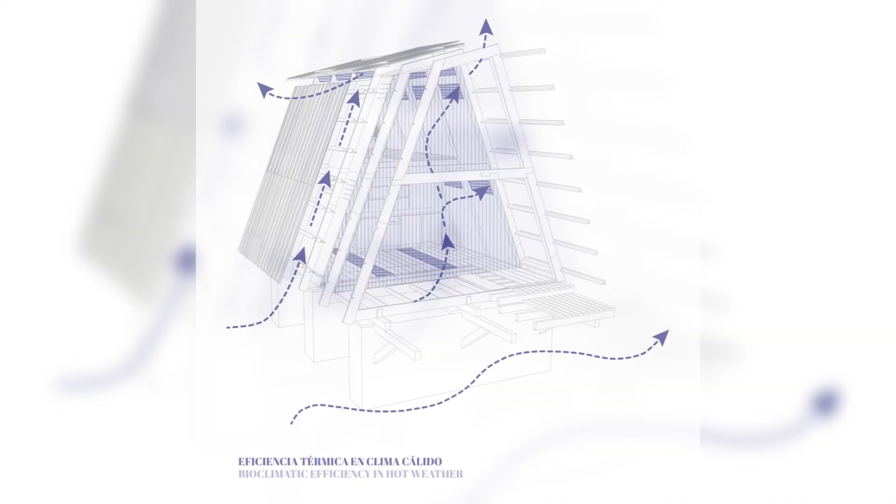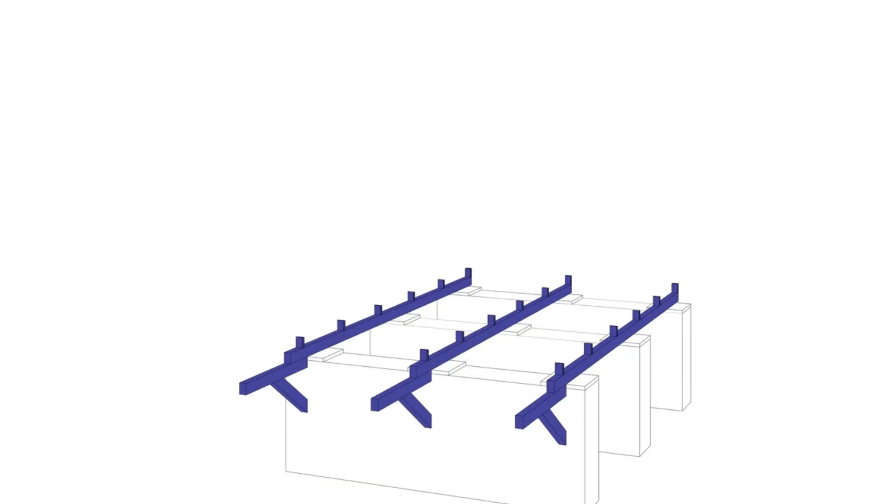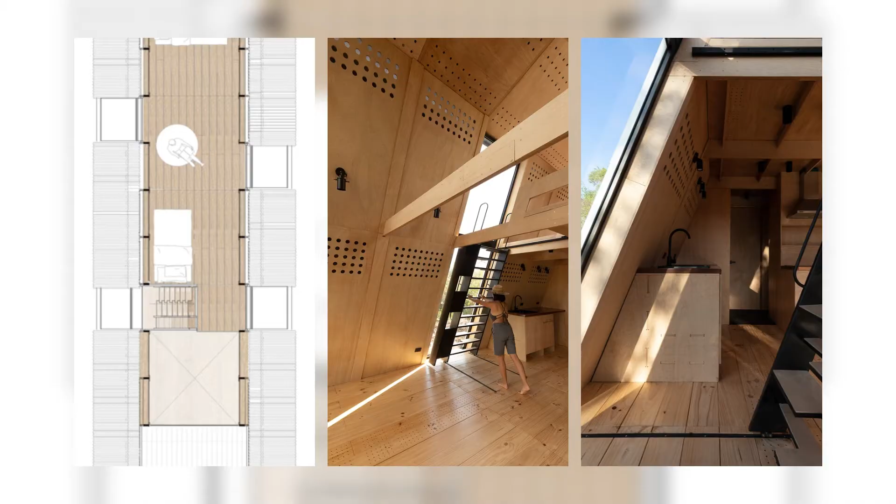Creating a sensitive and respectful habitat for all actors—the environment, the context, the user, and the team that conceives it—has been the premise of the design. Scalability, transport flexibility, adaptation to the context, and industrialization of processes have allowed the efficient use of resources, and most importantly, traveling with architecture has been achieved.

Sula is the second prefabrication exercise to validate the hypothesis that it is possible to generate a construction system that promotes collective well-being and generates minimal impact on the carbon footprint. A radical attitude towards approaching construction and the role that women play in architectural practice. It is the result of several battles to create the unthinkable.

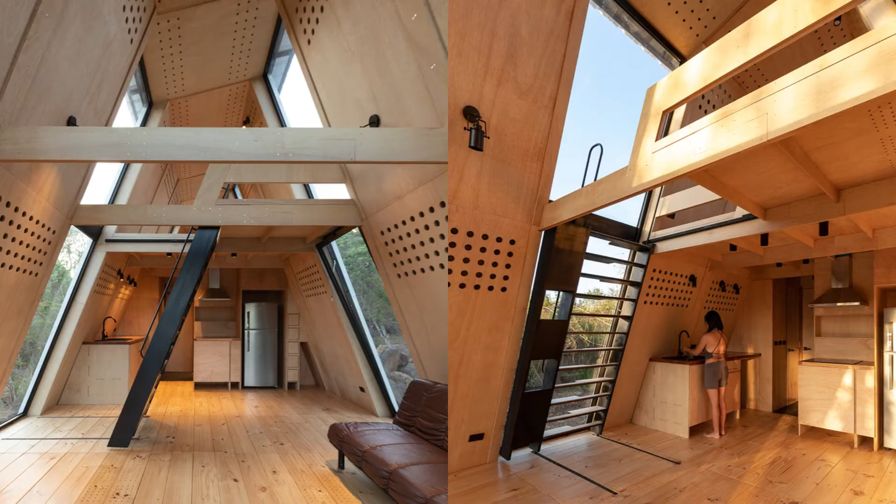Architecture: the design reconciles function with interior comfort by proposing bioclimatic strategies justified by dynamic thermal simulations. Sub-elevating the building allows for the use of inertia and the passage of currents to form a cold air chamber under the structure.

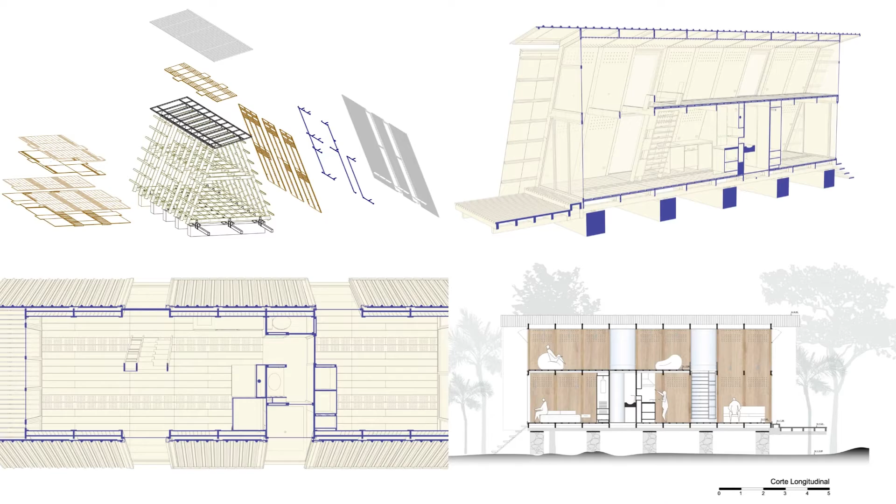The walls, along with the roof, create a double layer that houses the structural beams and forms another air chamber that ensures over-ventilation of the interior skin. Perforations in the floor and walls allow for cross-ventilation.

The elevation of the house also facilitates possible disassembly in case it needs to be relocated. Sula has its counted pieces. It functions like a large-scale Lego that can be transported in a truck and implanted in any type of environment.

The use of concrete is minimized to the maximum, which is why gabions were used as foundations, which can be easily dismantled in case of relocation, but above all, they are designed as a strategy to not affect the soil. It is a matter of respect for nature.

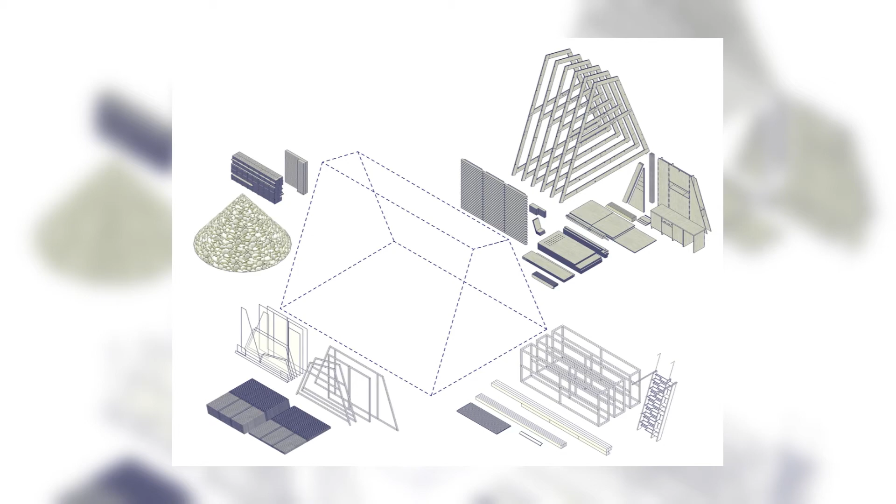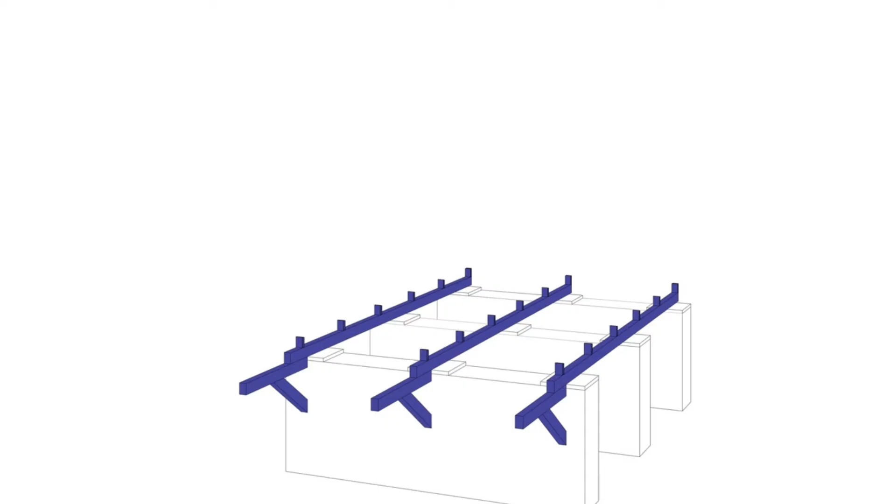Five unique materials—wood, stone, metal, glass, and PVC—intervene in a pure and proportional way to consolidate an environmentally balanced element. The participation of each material was filtered by the condition of efficiency and flexibility.

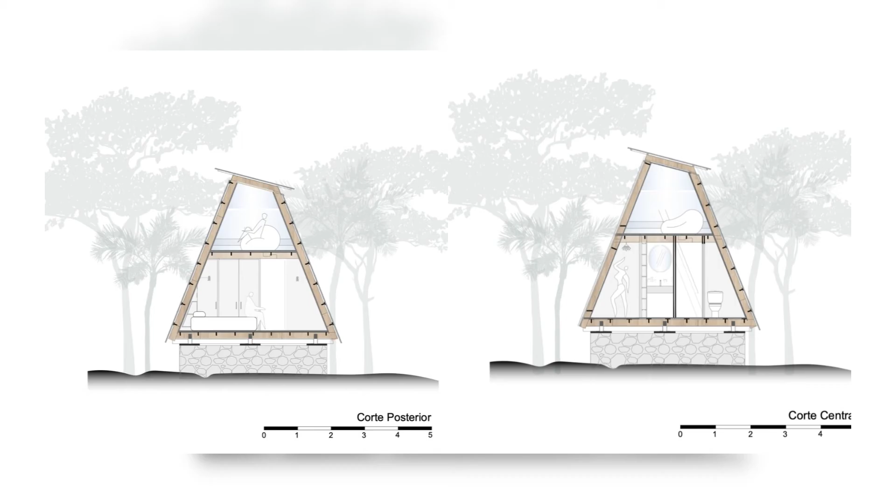Plywood is the most representative material, with which the structure, interior walls, furniture, and ceiling were built. The precision of the format, combined with a mechanized cutting process, guarantees resource optimization. The roofs were assembled with PVC sheets, which act as umbrellas, waterproofing the cabin.

The architect: what we are and what we do originates from the life we receive—family, place, position, and the opportunities we are born with. Being an architect, a mother, a woman is not easy in itself. It is not a complaint.

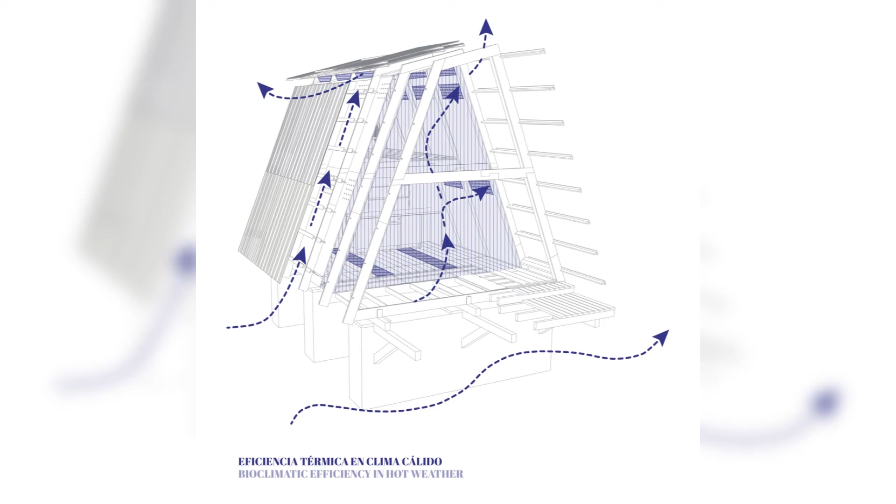It ends up being an eternal gratitude to life for allowing me to make a difference in some way in a perverse world, and to manage to come out unscathed from that mix.

It is a privilege to be able to do what you want when it means a real contribution to the well-being of all. A contribution to a change in consciousness, a rethinking of values, and questioning what really makes us feel alive.

Thinking about creating a habitat that is truly consistent with the environment and the quality of life of the individual demands deep reflection and relentless experimentation, but it is valuable.

In a world in which we cannot do much, let us at least be kind to ourselves. Let's create a habitat in which we don't have to just survive—one that truly makes us feel alive.